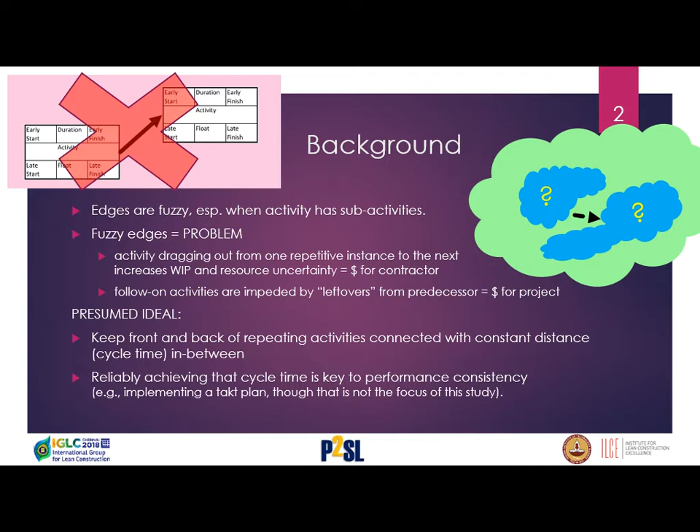Our presumed ideal is that, if we can keep the front activity kind of together with that back activity and have them both be performed repetitively through the project, we will be better off. And ideally, we would have a predictable cycle time and consistency of performance.

Okay, so the current conditions are that when work starts, people are very interested in starting the work. And we know, of course, that the activity needs to be finished, but oftentimes there is less attention paid to exactly how we finish the work. And as the start may be starting for repetitive activities at set time intervals, what we've observed is that the end of these activities as they start kind of stretch out.

So in the beginning, the end is close to the start, and then the next iteration gets a little further out, next iteration gets a little further out, further out, further out. And at the end, the contractor may find that they have a lot of cleanup stuff and wrapping up to do before they actually can call the job done.

And we're all familiar with the problems, right? We see activities are started despite the fact that they're unsound, or as Ronen says, with the lack of a complete kit. And the unfinished work in turn then results in this making do mentality, or what Carlos Formoso and others are calling the informal work packages that kind of appear on the job because it's obvious that work needs to be done. It's just that it wasn't quite planned as well as it could have been earlier on.

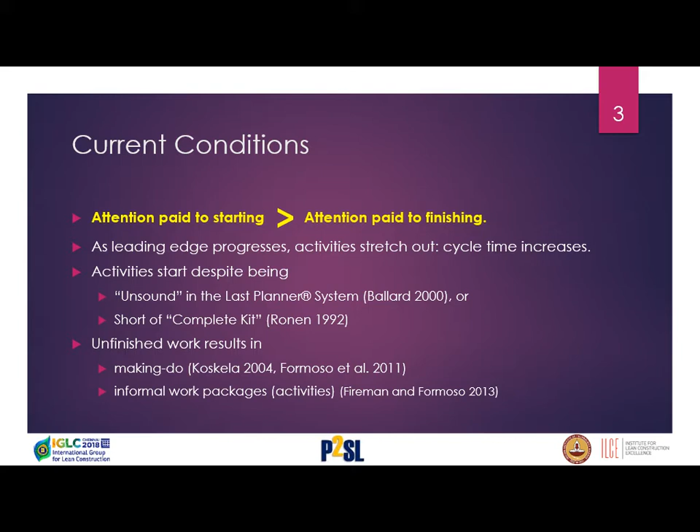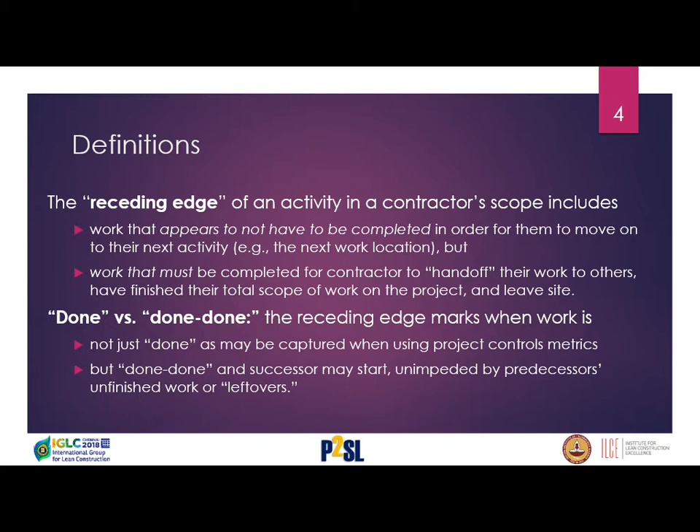Okay, so what is the receding edge? We're still a little fuzzy on the definition, but I think with the examples it'll become clear. So it is work that appears to not have to be completed for the contractor to actually move on to the next iteration of that repetitive work. But nevertheless, that must be completed for the contractor to be able to call their work not done, but as we say, done-done, right? Done and out of there. You don't have to come back.

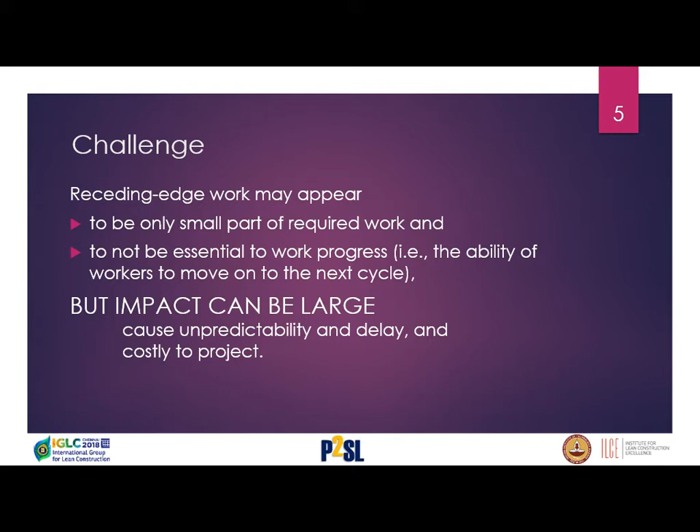Okay, the challenge is the receding edge sounds like it may be a small piece of work. We have some data from Webcor Concrete of all the hours that they spend on cast-in-place concrete work. What they call receding edge work was about 15% of these hours. And of the 15%, about 10% had to do with patching and fixing and those kind of things, right? So I think that gives us a sense of importance of the receding edge work and that perhaps we should pay more attention to it for, again, the contractor as well as for the succeeding trades.

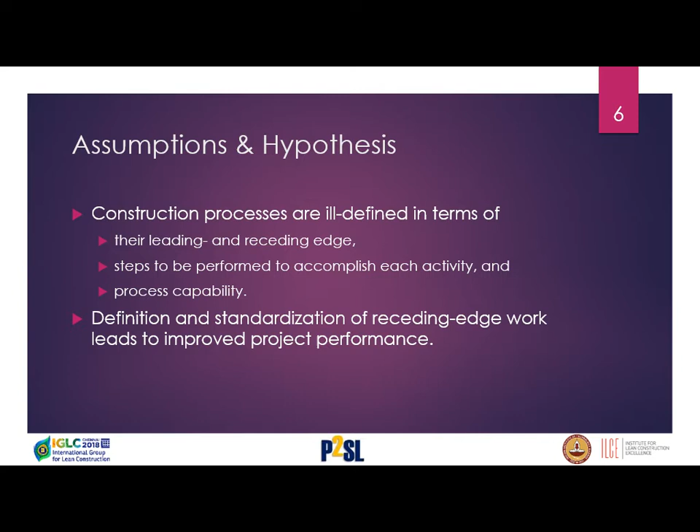Okay, assumptions are, we find that activities actually are ill-defined in terms of not just the front end, the leading edge, but especially the receding edge, their completion times. And that the steps to be performed for the activities are not necessarily well articulated, and that in fact, we have very poor what we call process capability, and I'll come back to that in a minute. The hypothesis is that by defining and standardizing receding edge work, we can actually have improved performance. Again, for this project, we didn't have a chance to measure that specifically, but that's where we're going.

Okay, process capability. What is process capability? It is a term, sorry. Can we go back one, please?

It is a term that's very common in manufacturing, but it's not widely used in construction. In construction, we talk about means and methods, and we assume that the contractor has means and methods, and they'll know how to do their work. But of course, there are many ways to do the work. If I ask you to build a floor, do you want to have a super flat floor or just a flat floor? It's really a matter of functionality that's desired that will decide on what means and methods the contractor is going to choose.

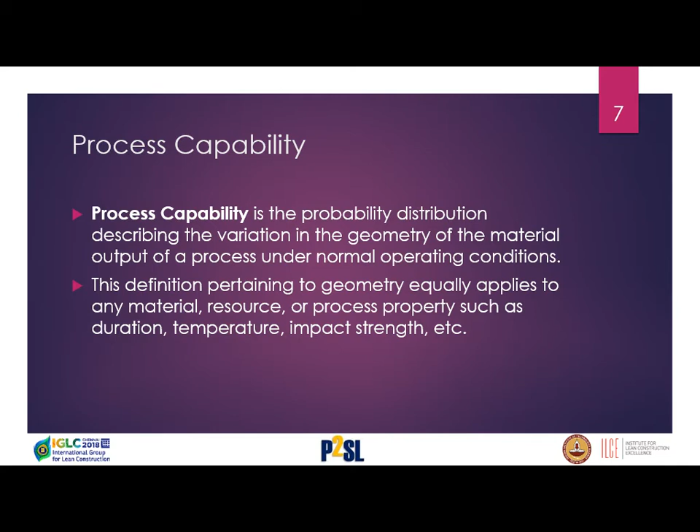And what's important about process capability is that we must be able to predictably produce an outcome, right? Predictably, still characterized by some kind of probability distribution, will never be 100% perfect. But at least we want to have some sense of consistency and ability to achieve a certain output, and that's process capability.

Okay, so with all that sort of theory, let me move on to talking a little bit about the project. So the project that we looked at is a high-rise building in San Francisco, 55 stories, south of Market Street. It actually was erected in a 3-day takt time, floor by floor by floor. So Webcor Concrete is very good at enforcing that takt time, and every 3 days, move to the next floor, move to the next floor, move to the next floor.

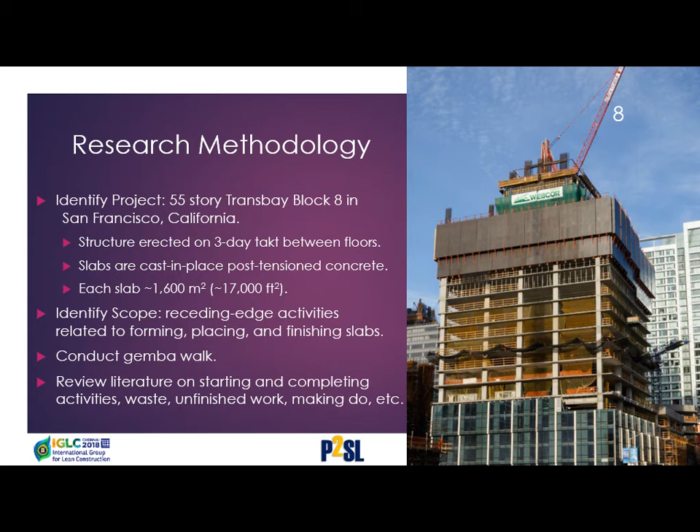But the receding edge activities in this case were a challenge. So students and I went out for a Gemba walk, and we also reviewed the literature on what we could find about not just starting activities, but ending activities. Can we do the next slide, please?

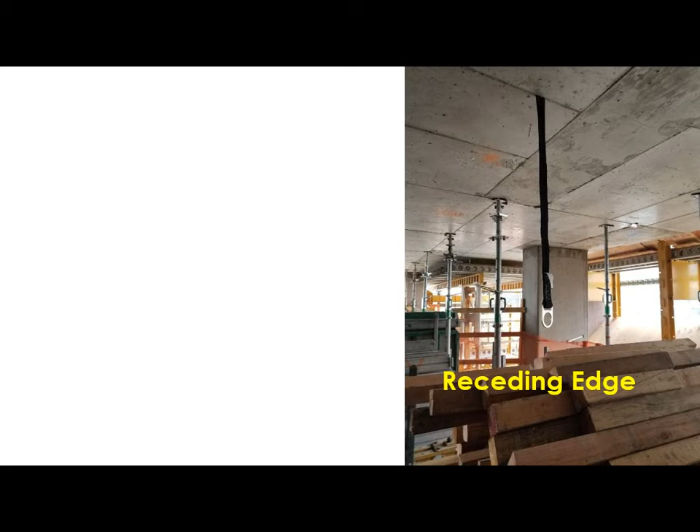This is the receding edge, right? So this is the floor below after the forms have been stripped. Obviously, a lot of shoring material, formwork material that is going to have to be flown up 2 stories up. But you also see components such as this one, right? What is this? This is a strap, a safety strap that the iron workers were using when they actually were doing their erection work. It gets cast into the concrete, but it needs to be removed before the concrete contractor is done, right? So that's what we're talking about. So this is what the receding edge looks like.

So we went out and actually looked at the kind of work that needs to be done. So the floor needed patching work, the ceiling had some dripping concrete, right, which does not meet the quality specifications. So they had to get out and fix that.

One of the challenges that this contractor has is in fact that they have 2 different trades performing the work. So they have carpenters doing all the formwork up front, and then they try to use laborers for the receding edge work, although there was some work still to be done by the carpenters in the receding edge work as well. The reason is that the pay rates for laborers are different. About 70 or 80% of the pay for carpenters, and so the contractor is trying to save money

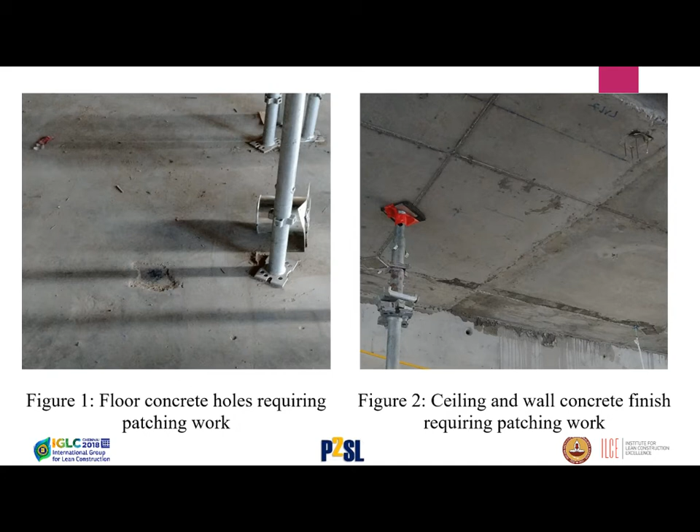in having two skills. The problem is that by having two skills, one skill essentially on the leading edge, another one on the receding edge, is that there is little feedback, right? So if we see all these patches, maybe there's something that the laborers could tell the carpenters to do to avoid the patches. But that is a difficult conversation. Okay, so consequently,

we observe all the patches, we observe the repair work that needs to be done, and of course there are countermeasures, proactive countermeasures, what can we do to prevent? Reactive countermeasures, which were the ones that we actually observed in the field, right? And even in the reactive countermeasures, there didn't seem to be any process at all, and so there's an opportunity to standardize, to be more systematic in terms of cleaning up.

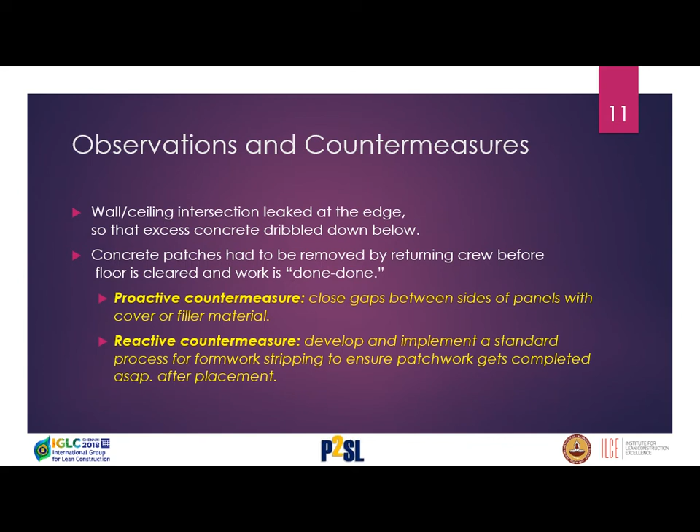But of course, ideally, if the concrete is dripping, maybe proactively you can try to avoid the gaps from occurring. So you can put on tape on the formwork, or you can put on a filler material so that there won't be any dripping, right? But again, it's feedback that needs to come from the receding edge to the leading edge to do some more work. And of course, they're already working in a frenzy to maintain that 3-day takt. That's the challenge.

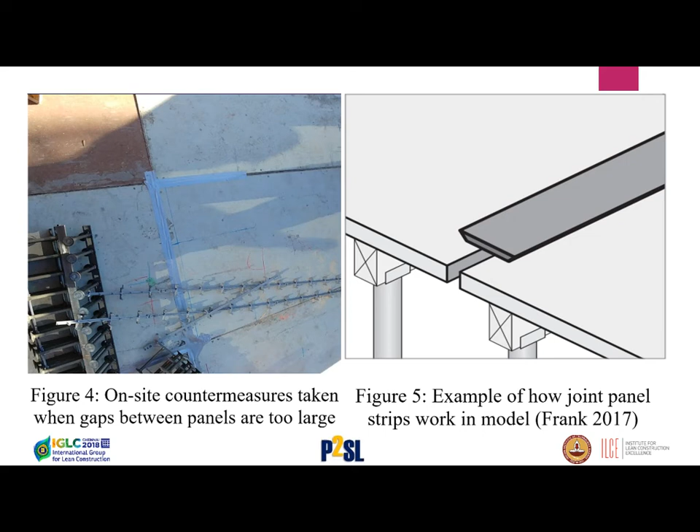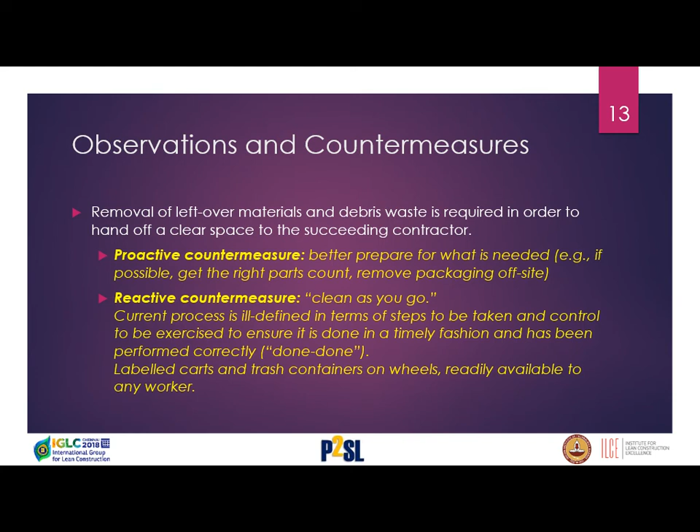The reactive countermeasure is that this contractor says, oh no, we have a clean-as-you-go process in place. We do that clean as you go. But of course, once you're out in the Gemba, it was not observed. What can I say? One of the options, in the reactive end, is to actually use carts.

I took the liberty to take a picture from Veidekke's manual: personal waste baskets, right? Get people to have an easy ability to clean up after themselves. That was an easy to adopt suggestion. In fact, this is a picture on another project, but from Webcor Concrete, that I took because I thought that was a good idea and they implemented it right away. Okay, so these are but some examples. Next slide.

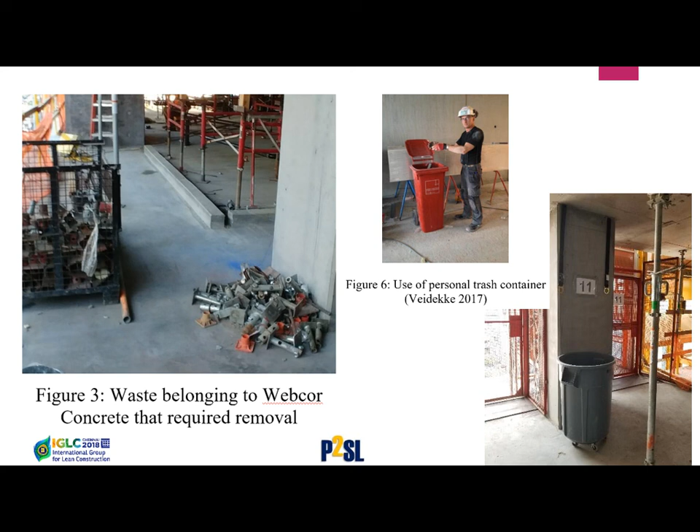What are the findings of this work? Well, one is work processes are defective or they're non-existing at the receding edge. We think it's really important to spell out process capability to figure out who's going to do what, where, when, and how.

Interestingly, as I was doing the literature review with the students, we read a lot about Lauri Koskela's 8th waste, which is called making do, which is obviously what we observed on this project. I don't think what we observed is actually an 8th waste. I think it's a defect, one of Ohno's wastes, and it's a defect in the design of the method that we provide as input to the crews to do their work. Right, so we'd like to improve process capability so these defects can go away.

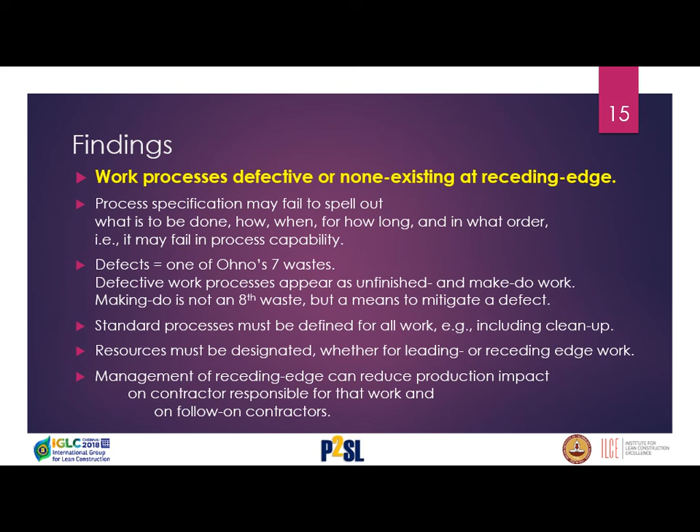We can define standard processes. We must designate resources also to do the work and not just say, oh, just go clean up this stuff without having an idea how much work is involved. And ultimately, we think this will have quite a bit of impact, not just on the contractor themselves in being more predictable in getting out of there, but also on the contractors that follow them that otherwise have to work in a very cluttered workspace. Okay. Next slide, please.

Okay, so contributions. We articulated this receding edge. It's still a little fuzzy, but I think you get the idea what we're talking about. It's about finishing the work so it's done. I think the main takeaway here is to think about process capability as one of the defects that we are dealing with in our construction sites, and think about how we may be able to improve our process capability so that this defect can go away.